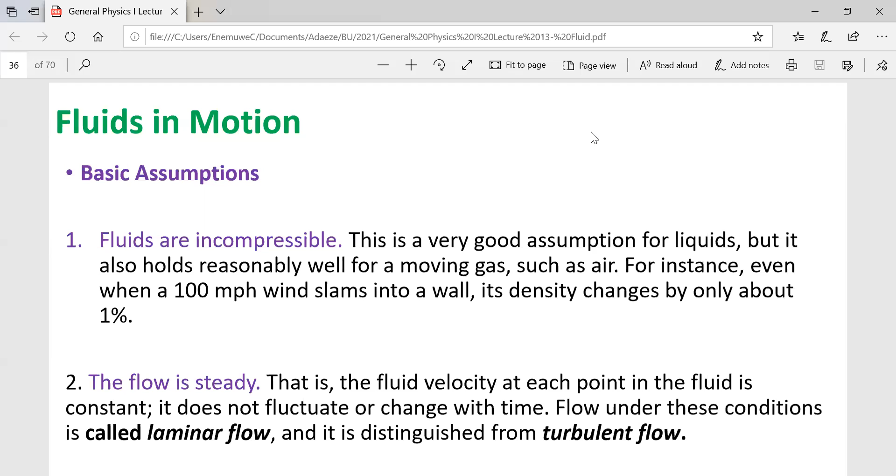So we want to look at the basic assumptions. There are acceptable assumptions that are generally used at the fundamental stage to avoid complexity in the discussion of fluid in motion. So one of which is that fluids are incompressible. Okay. Now, when we say fluid, we're talking about flowing objects or flowing liquids. And by that, we are referring to not just liquid, but gas and liquid make up fluid.

Okay, so that is why we are emphasizing here that the first assumption would be that fluids are incompressible. It's a very good assumption for liquid, and it also holds true for a moving gas, such as air, which is the most common one that we interact with on a daily basis. So an instance where air displays the assumption that it is incompressible is if you have an amount of air moving at 100 miles per hour slammed on the wall, the density will not really change, but only by a minute value of 1%. Simply means that such fluid volume cannot be compressed.

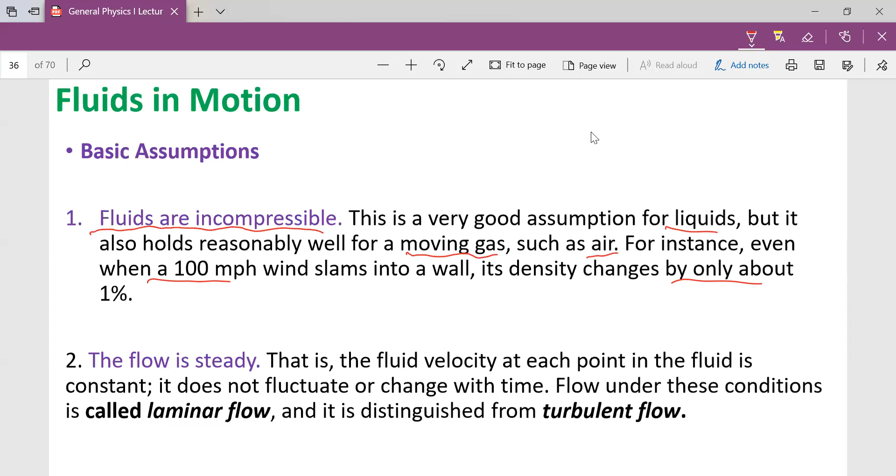Okay, so the second assumption is that we're going to stay within the domain of the flow, assuming that the flow is steady. Fluid flow is not always steady, but we'll have moments when it is steady. So it means that we're just going to stay within the domain of steady fluid flow. Okay, so we're assuming it's incompressible, and we're assuming that fluid flow is steady. And what do we mean by that?

When we have a flowing liquid, the fluid velocity at a point in the liquid is constant. And that is what we mean by flow is steady. So it does not fluctuate nor change with time. It remains the same. For any fluid whose flow is constant or is moving at a constant velocity, that is, it's not fluctuating or changing over time, we call such flow, take note of this word, okay? We call it laminar flow.

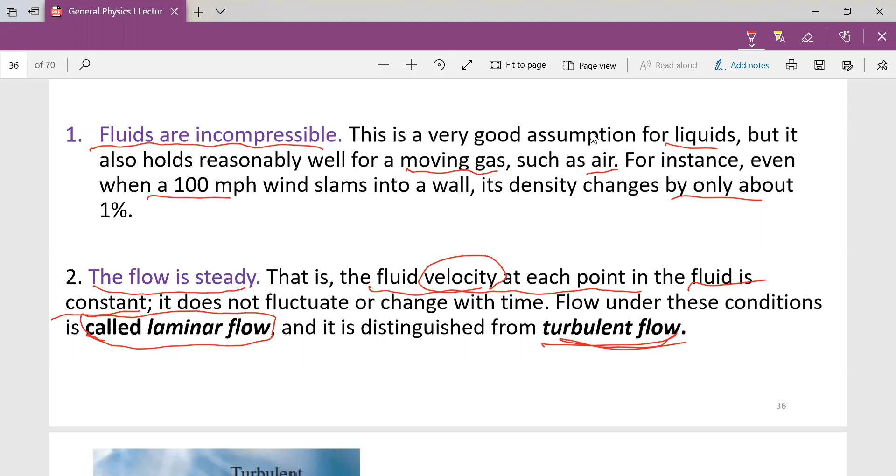Now, we have a counterflow such that the velocity is going to change and the flow becomes complex. To describe such flow, we use the word turbulent flow. And we know turbulence kind of spells negativity, but it's actually a description for flow whose velocity is changing or fluctuating randomly. Let me not use the word constant rate.

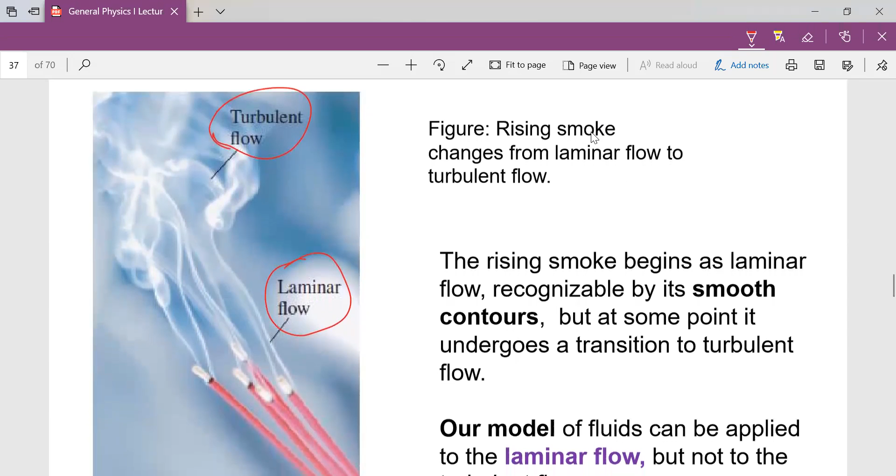Okay. So we have the image before us here. We use this image to describe clearly the difference between the turbulent and the laminar flow. You see, when you look at the region for laminar flow, it has smooth contours. You can actually define the lines. You can see the clear definition of the lines.

But when you get to the turbulent region, they are so mixed, moving randomly, such that the contours are not well defined. Okay, so when we say the second assumption is to stay within the domain of laminar flow, it means we are just going to stay within the domain where the flow lines are clearly seen and defined with smooth contours that can be described. So this is majorly the difference between turbulent and laminar flow, and it is the laminar flow that we use as our model for the description of fluid throughout the discourse of fluid in motion.

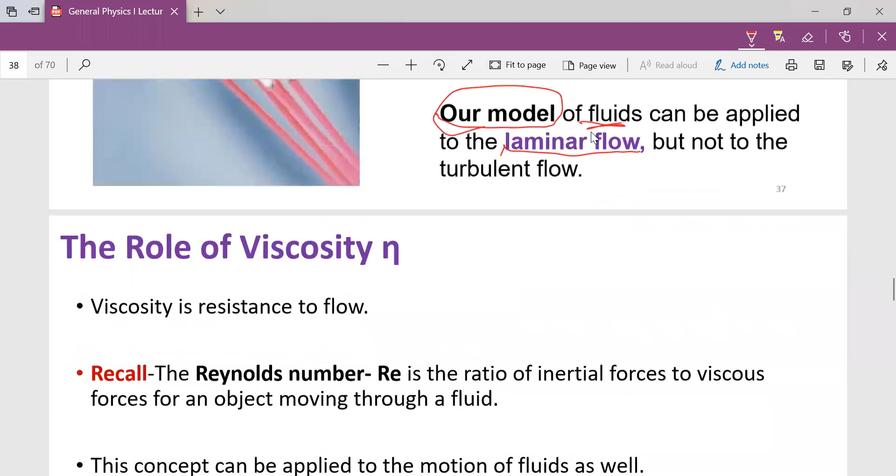Okay, so whenever we talk about the subject of fluid, we always have to look at the characteristics that describe fluid in motion, one of which is viscosity, with the symbol eta.

Now, we have looked at viscosity in chapter 5 when we're looking at applying Newton's law. Okay, when we're looking at applying Newton's law, we looked at viscosity and we discussed it with reference to drag. I think that was like a class after our drag lab.

We emphasized there that viscosity is similar to friction, and it simply means resistance to flow, just like friction is the resistance to motion. Okay, so viscosity should be viewed as the counter force like friction in liquid. It means that if you understand the idea of friction very well, it will help in understanding how we're applying viscosity to fluid motion.

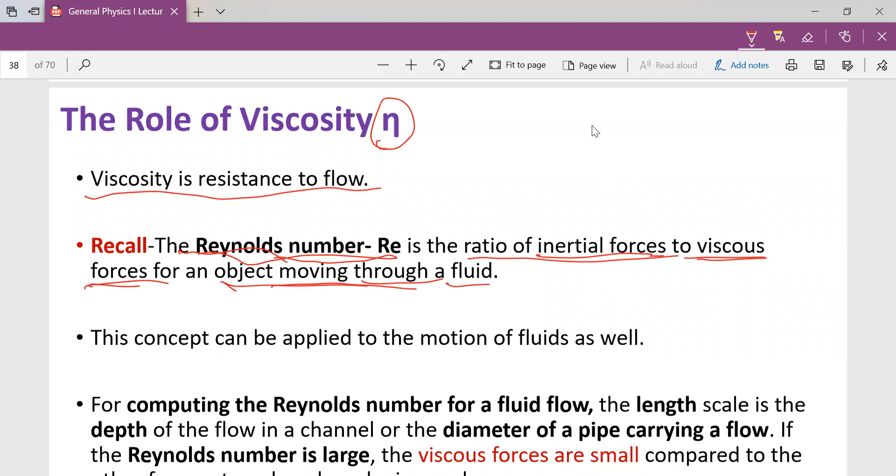And when we discussed in chapter 5, we used Reynolds number to describe the ratio of the inertial forces to viscous forces in an object moving in fluid. So we said that we use Reynolds number to define when the viscosity is high or low and when it can be ignored. So we also want to use what we learned about Reynolds number to apply to the concept of the fluid in motion.

And what is the basic idea we want to take from there? We want to emphasize that for fluid in motion, when you determine the Reynolds number, which is the ratio of the inertial forces to the viscous force, when it is large, the viscous forces are small. And what is the importance of that? It can be ignored. Just like we can, in certain scenarios, ignore friction and drag forces in our calculation, so also we can ignore the viscous force, or ignore viscosity in some of our applications.

And we do that mostly when we have a large flow, like the flow of the ocean or river. You have to do some calculation with respect to bridge construction and all that. You factor the flow, and sometimes you have to ignore viscosity because the flow is large. All right, so those are scenarios when we ignore viscosity. Okay, so let's see an example of when viscosity is ignored and when it is not. We said Reynolds number helps us define that. When it's large, the viscous forces are small and can be ignored.

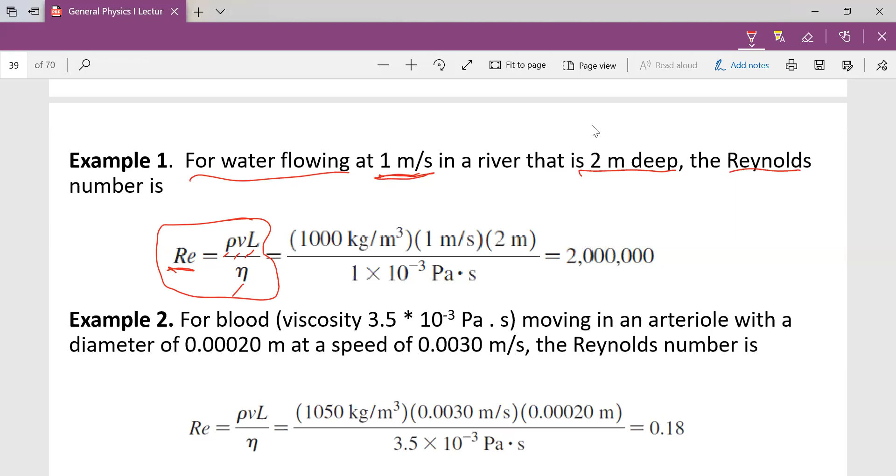Then we'll have the density of the fluid, the speed or velocity of the fluid, the depth, and the viscosity. Because we have seen this, I didn't have to define the parameters. You can always refer to the discussion of viscosity in chapter 5. We're just building on it, using the idea to explain fluid in motion.

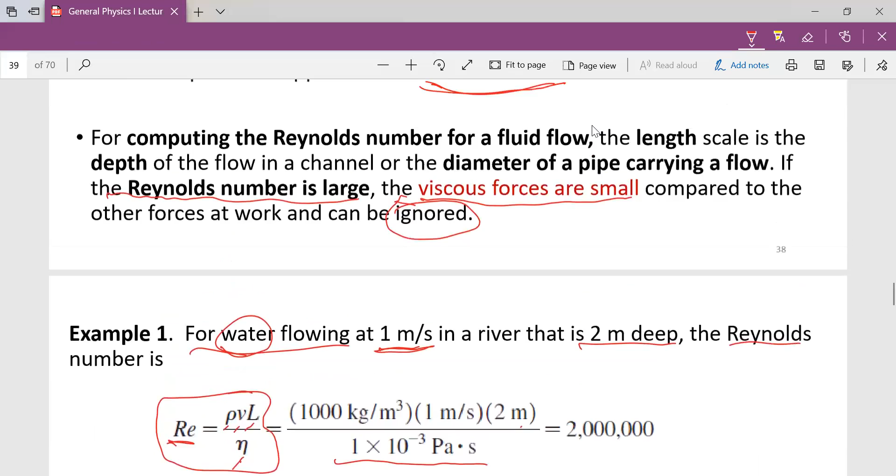Okay, so we know that for water, the density is 1,000 kilograms per meter cubed, the speed and the depth as given. Then we'll have the viscosity as 1 times 10 raised to power minus 3, which is a constant and it will be supplied. For the viscosity of water, I think we put a table like that also in chapter 5. So inputting that into our formula, we got the Reynolds number to be 2 million.

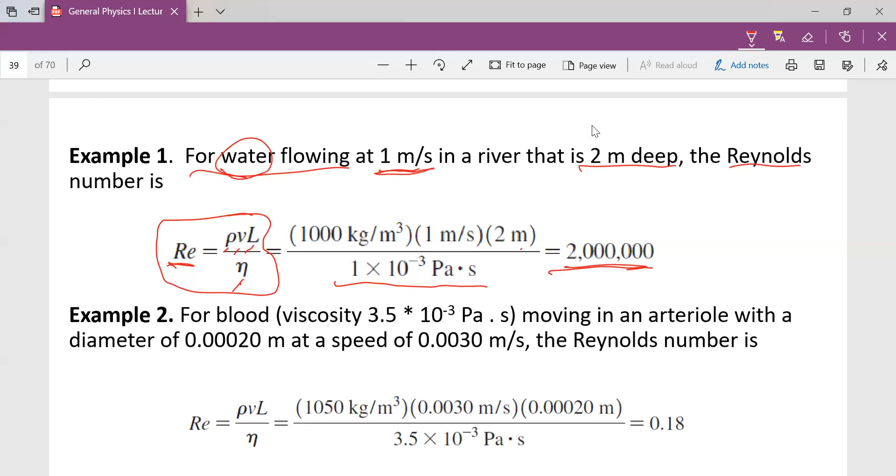And you remember that in chapter 5, we described that when a Reynolds number is, I think, 100,000 and above, then we can refer to it as large. And we had the large, the middle, and the small Reynolds number values. We just picked the large and the small. We really did not discuss the middle because the middle applies to the complexity of fluid dynamics, and we'll not get far into that.

But let's look at another scenario where you have blood flow moving in an arteriole with a diameter of 0.0002 meters and a speed of 0.003 meters per second. If we determine the Reynolds number, we see that it is small, and this implies that in the river we can ignore the viscous force because it's small, but here we cannot.

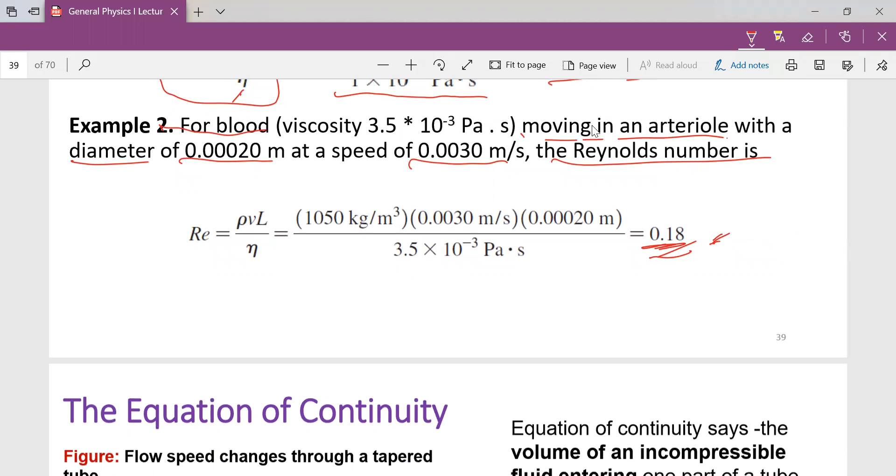So whenever they are doing calculations about sending fluids or blood flow, regulating the heartbeat to control the flow of blood in the veins and arteries, they factor in the Reynolds number because it will greatly influence the decisions in that design.

Now, apart from the properties such as Reynolds number and viscosity, we have other properties or other subjects that apply to the description of fluid in motion that are very important to understanding how fluids flow, especially when they are changing from a large area or surface volume to a smaller size. And we'll be looking at 3 equations, which is about concluding this part of our discussion. 3 equations outside the Reynolds number and viscosity ideas.

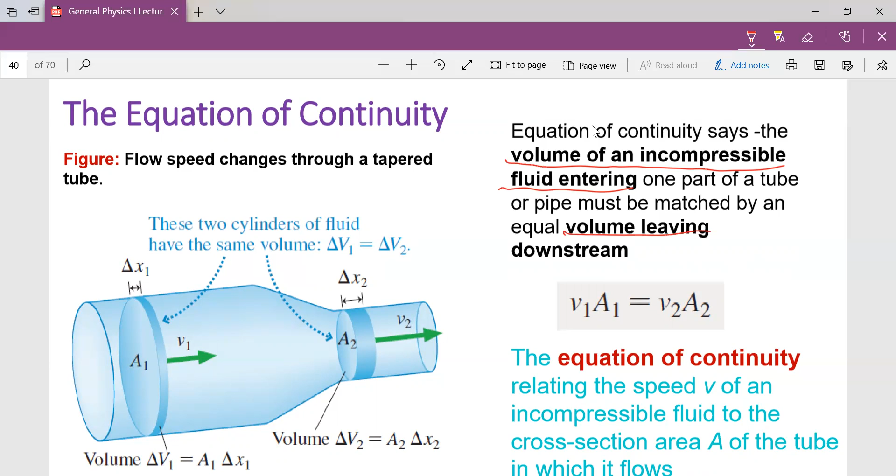Okay, so the first is the equation of continuity. The second will be Bernoulli's equation, and the third will be the Poiseuille equation, which is the last one. So let's start with the equation of continuity. Remember our assumption throughout is what we'll be using. The equation of continuity says that the volume of an incompressible fluid entering one part of a tube or pipe must match or is equal to the volume leaving downstream.

Okay, so let's see the figure before us. The figure before us is a description of the flow speed change in a tapered tube. Now, we have examples of tapered tubes every day. You use your toothbrush, you press the fluid from inside the toothpaste onto your brush. That is a typical example of a tapered tube. So you see that the content inside is pushed through the other side to get the fluid or liquid that is inside that tube.

We have other examples such as the flow of blood in our arteries, moving from the heart, that will adjust to different sizes of our arteries. Also, we have the flow of oil in pipes and so on. So we meet tapered tubes every day to control the transportation of fluid in several systems. So if we look critically at this to understand the statement of the equation of continuity, which says the volume entering is equal to the volume leaving, it establishes that the change in volume for 1, let's use the big size as V1, is equal to the change in volume V2. That is the basic statement of the equation of continuity.

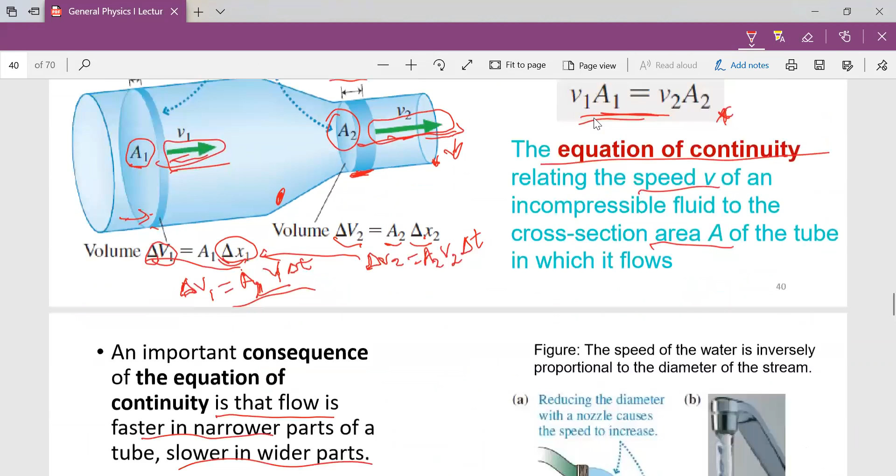It's telling us that the flow is faster at the narrow part than the wider part. If you look at the velocity vector diagram, the arrow here is longer than this one. So you see the flow is faster on this narrow part than the larger part. That is one.

We have other consequences, the understanding of which we use to describe the volume flow rate Q. So if you look at the diagram we have here, you see the area here is larger than this one. What does that tell you? It means that the speed here is lower than this one. We said the flow at the narrower part is faster than that of the wider part.

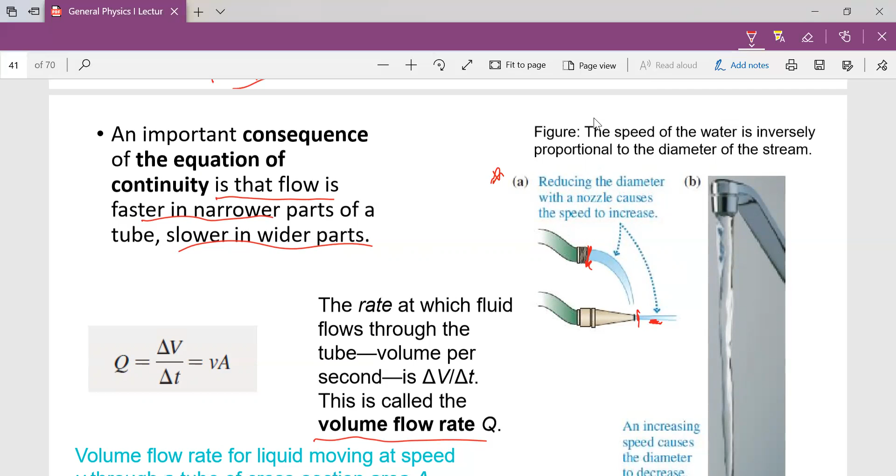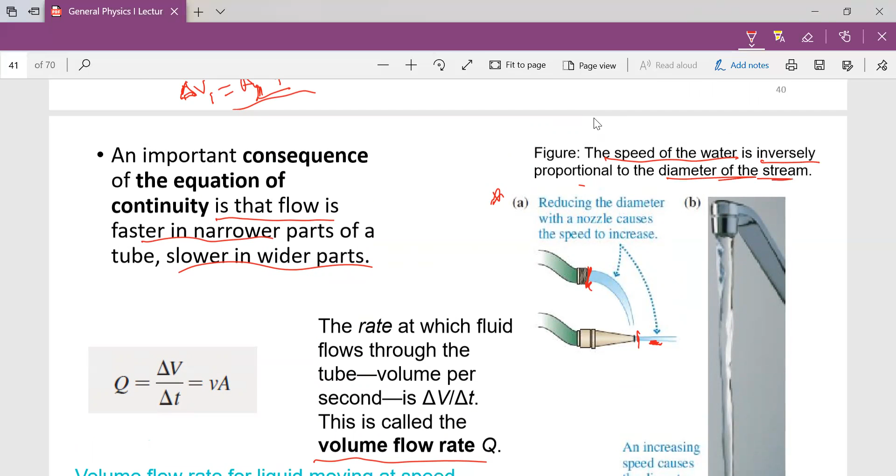So it is this idea that we also use in the design of your water tap openings and the pipes that will run in the house. Okay, so simply put, the speed of water is inversely proportional to the diameter of the stream. The speed is inversely proportional to the diameter of the stream.

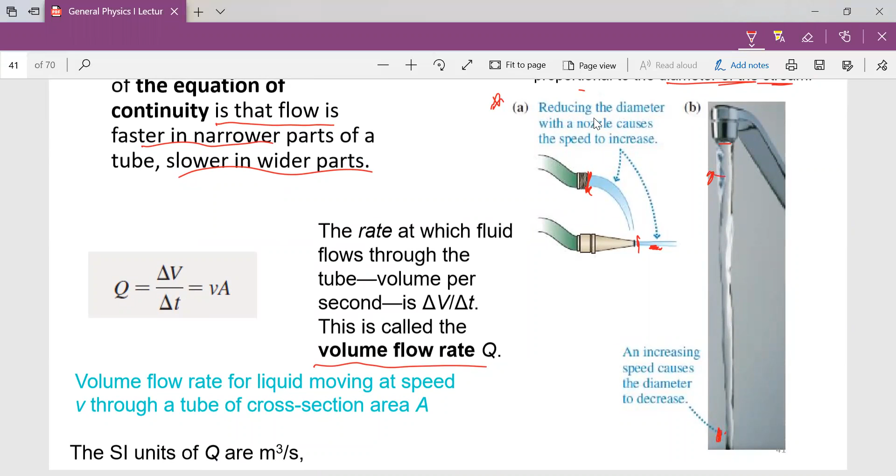If you look at this diagram, you see that as it's coming out, the area here is wider, the speed here is larger than the one here. Okay, so distance also plays an important role, which we'll be seeing again. So let's quickly look at an example.

The question says a garden hose has an inside diameter of 16 mm and the hose can fill a 10-liter bucket in 20 seconds. The question is, what is the speed of the water out of the end of the hose? And what will you do to increase the speed 4 times, to make it 4 times greater?

So we apply our equation here. Take note of this, the flow rate, change in volume, being equal to V times A for a steady flow, okay? That is for laminar flow. So applying that, if Q equals VA, V, which is the speed, will be equal to Q over A.

We determine our Q from the equation change in volume over change in time. They give us the volume and they give us the time. We obtain this in liters per second. So before we can apply it into the equation, we have to change the unit to standard value to obtain 5 times 10 raised to the power minus 4 cubic meters per second. So that's what we put here.

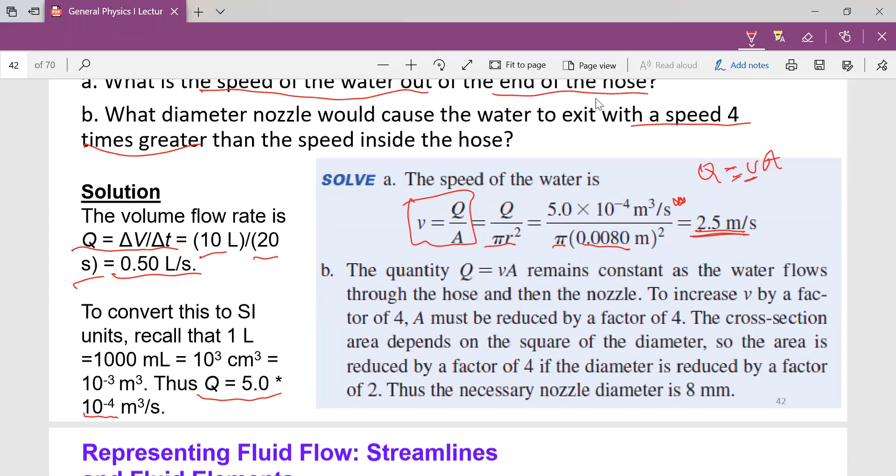They said, what can be done to increase the speed by a factor of 4, make it 4 times greater? So to make that 4 times greater, we see in this relationship that we have to work on the area. Remember our first diagram, telling us that we increase the area, we reduce the speed, we reduce the area, we increase the speed. It means that the area has to reduce by a factor of 4.

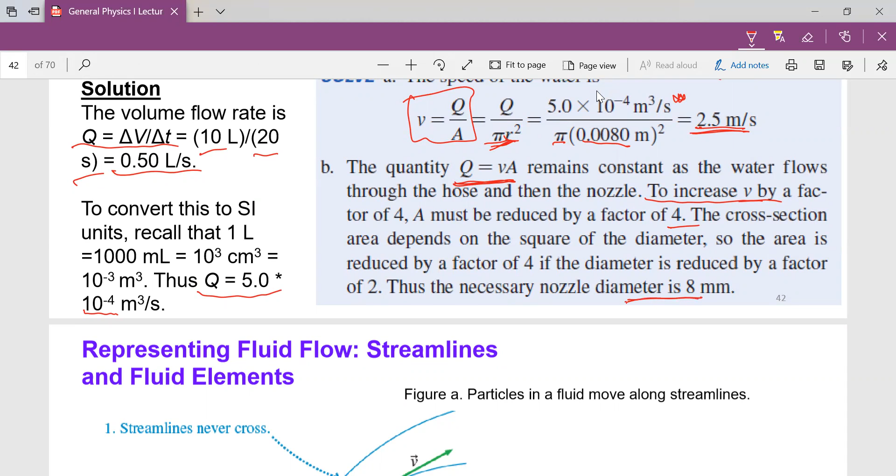Okay, so in the description of a continuity equation, we have other parameters that help us understand fluid as well. One of which is when representing fluid, we use the terms streamline and fluid elements. Streamlines are simply paths taken by the particles of fluid. If you can point out a particle of fluid, especially in laminar flow, you see them clearly with defined contours. The particles of fluid have a trajectory. That trajectory is what we call the streamlines.

And we'll have another one, which is the fluid element, which will be seen in the next slide. It's simply talking about the movement of a certain volume or large amount of fluid. We call such a fluid element. And when we are focusing on the particle, it is called a streamline. So you have multiple streamlines inside a pack called a fluid element.

So now we have said this is the trajectory followed by the particle. This is a trajectory, this is a trajectory, this is a trajectory. One of the characteristics of streamlines is that they never cross each other. Okay, they never cross.

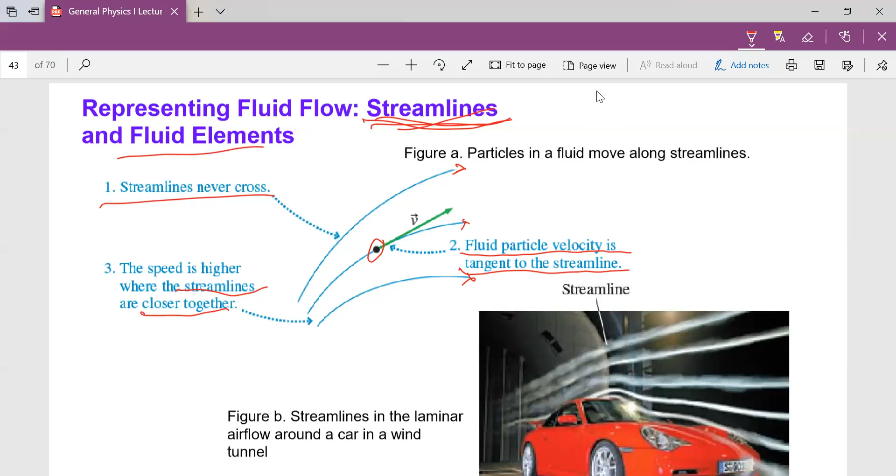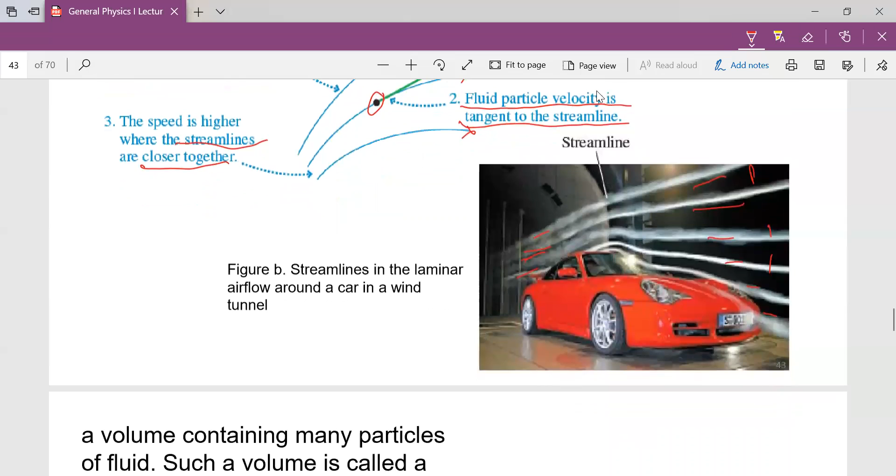So the speed is higher when the streamlines are closer. When they are wide apart, it simply implies that the flow is slow. When they are closer, packed together, it is fast. So you see the wind, which is the fluid, the gas over the car, you see how it took the contour, and the trajectory of each of the particles can be seen. When they are closer together or far apart tells you the speed: it increases when they are tight, slows down when they are wide apart.

So let's quickly look a little bit at fluid dynamics. Now, the equation of continuity described to us the motion of objects, but did not specify why fluids are actually moving, what is actually inducing the motion. So when we want to talk about fluid dynamics, we want to look at what is inducing that motion, what are the laws governing that motion. And it is this dynamics that will help us look at the two other equations that we said we'll be looking at today.

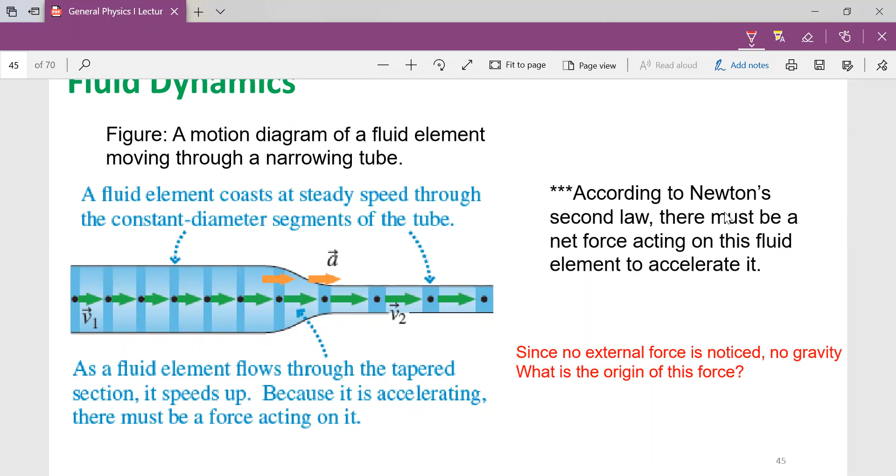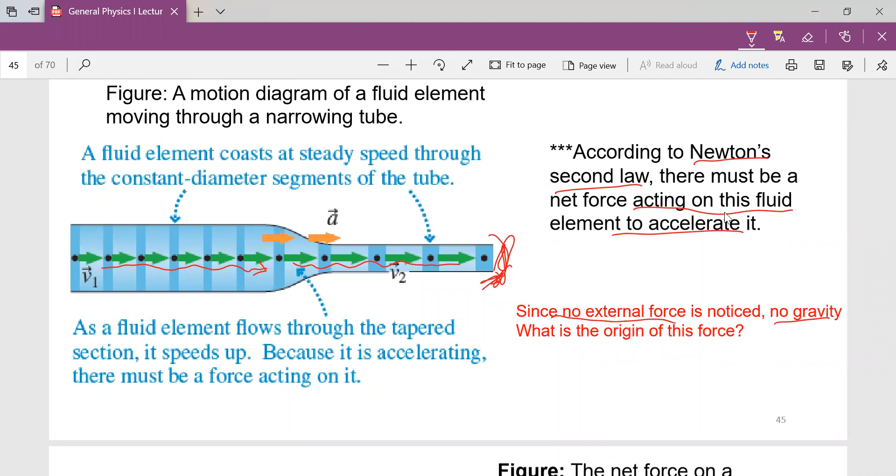So we see a fluid here, a description of a tapered tube. You notice if you look at the vector diagram of the speed or velocity, it is increasing as it goes into the smaller size of the tube. Okay, so we want to use Newton's second law also because it applies here to understand how this fluid is accelerating. We can notice that there is no external force. There is no force of gravity since it's moving horizontally. So where is this force actually coming from?

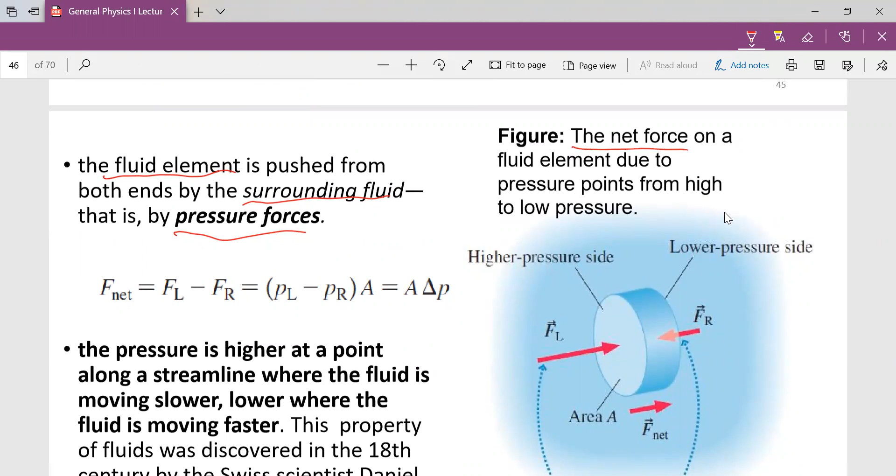The force is actually coming from the fluid. Remember fluid elements, the bulk of fluid, volume of fluid together, pushing at the end of each other, with the walls of the container and also pushing at the fluid particles. So it has a surrounding force that we'll call the pressure force. So it means that we're going to be applying our understanding of Newton's second law and pressure to describing fluid flow. And that says that the net force on a fluid element due to the pressure goes from high to low pressure.

This diagram specifically shows that. Look, the net force is always going to be in the direction of what? The acceleration, remember Newton's second law. So we see the force here from the left is higher than that of the right. So the net force is in that direction. The acceleration is towards that direction. And the relationship of the pressure to the area and force is what we describe with the word Bernoulli's effect.

And it simply tells us that the pressure is higher at the point along the streamline where the fluid is moving slower. So the pressure in the larger area of that tapered tube is higher than that of the smaller parts. So with high pressure, the speed is low, but with smaller pressure, the speed is high. Remember your pressure equation is P equals F over A, right? That means force is equal to PA. That is what you have here.

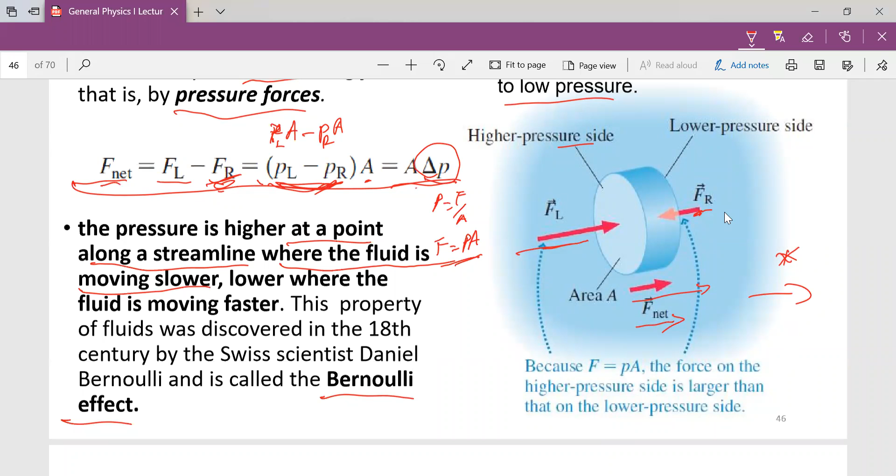And this actually implies change in pressure. So we'll have F net being equal to area times change in pressure. And that statement simply tells you that the pressure in the larger part is higher than that in the smaller part, and that is why it moves at that slow rate.

Okay, so we'll have the instrument that we use to measure the fluid speed, and that instrument is designed according to the venturi tube. We have several devices with different names, but they use the principle of the venturi tube. Okay, so the device, the venturi tube, is what we use to measure the speed of fluid. And how does it do that? By factoring the difference in pressure and also the difference in the distance of this.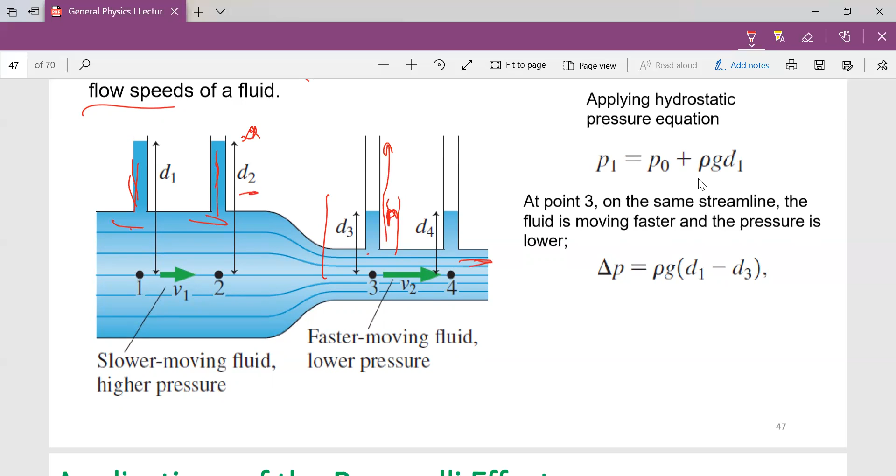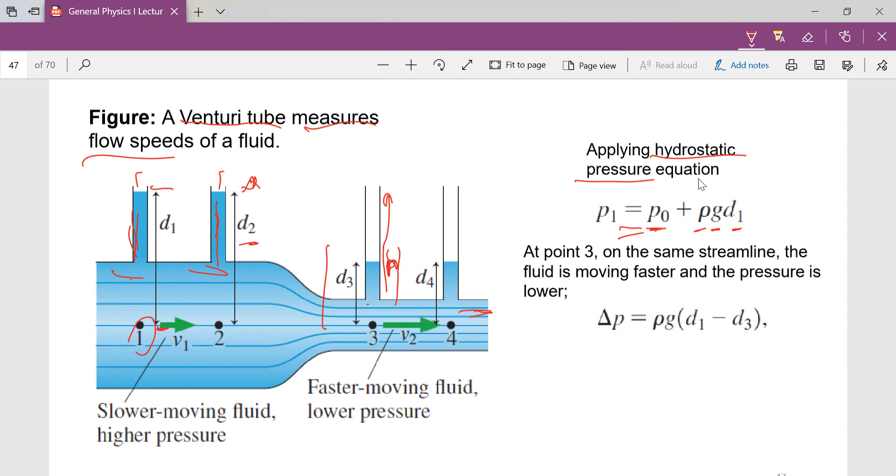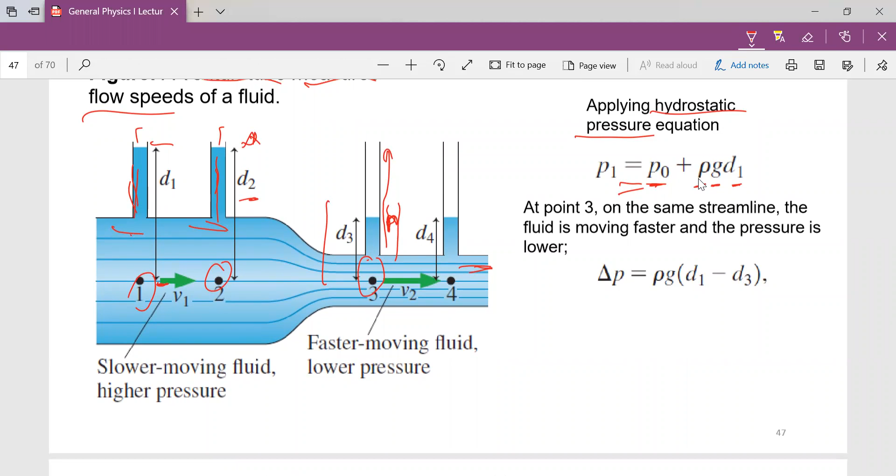So we'll apply the equation we have seen before from the hydrostatic pressure equation, that the pressure at point 1 will be our P0, atmospheric pressure acting here, being equal to the density, the gravity, and the distance here from the midstream line of that tube. Okay. But at point 3, that applies also to point 2. At point 3, where the fluid translates to a smaller portion, we have the change in pressure to be actually the change in this distance, which is the change in D1 and D3.

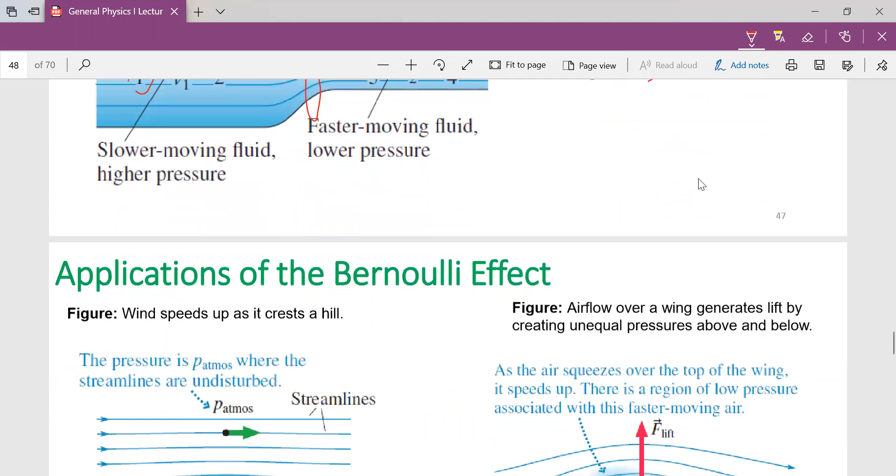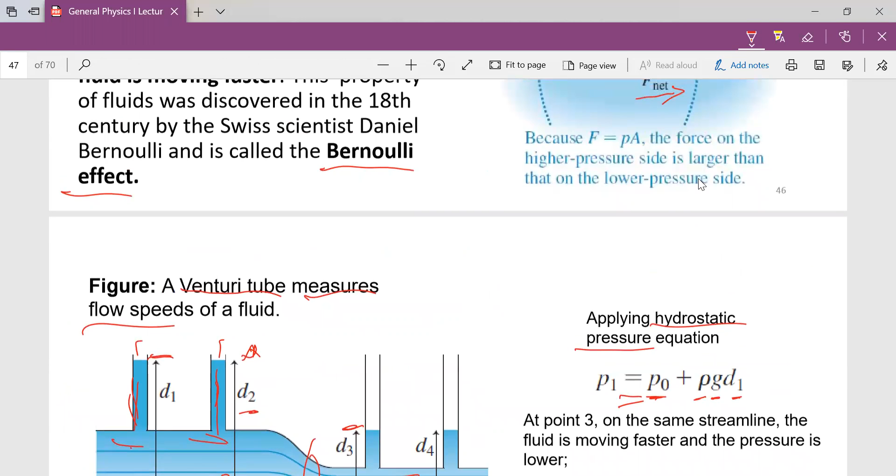You see the D3? Let me remove all this so you see it clearly. The distance from the midline to the fill in that tube. So this is how the flow rate across this bend can be determined using this venturi tube. Okay. So this simple design is what is put together in many devices that we use to measure the flow speed of liquid. So we have emphasized that this is actually the application we call the Bernoulli effect. Let's see how that plays out in real life.

We have different instances where we apply the Bernoulli effect to science and technology. And basically, before we mention other examples, let's see how it works. I said that when you have even spacing, it means what? The constant velocity for streamline description. So we have a description of the wind speeding up across the crest of a hill. This is the hill here. The winds here are moving at constant speed. You see the speed here is constant, but once they are cresting or moving over a bulge, you see something happens to the velocity vector.

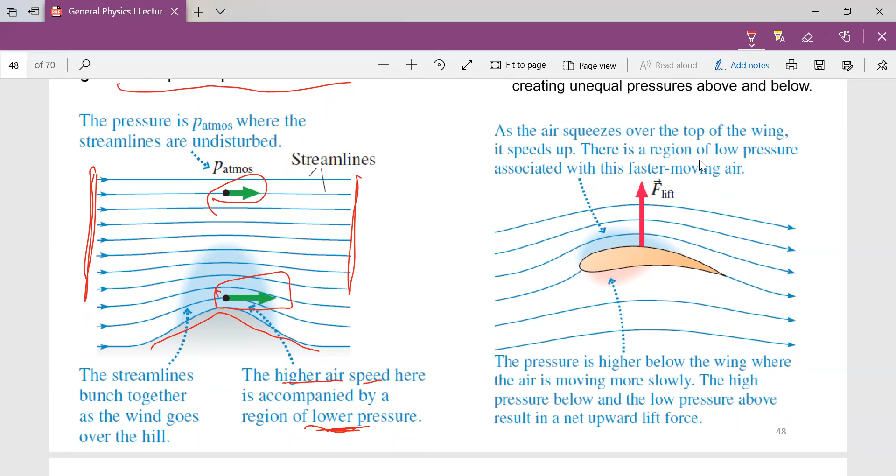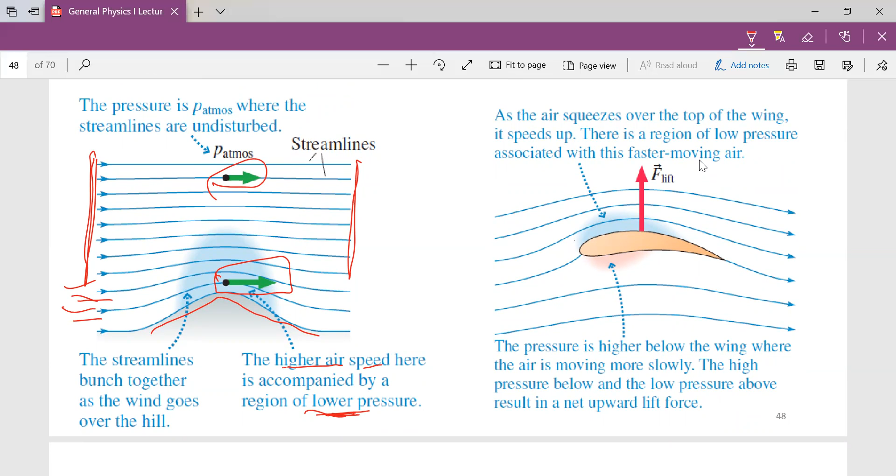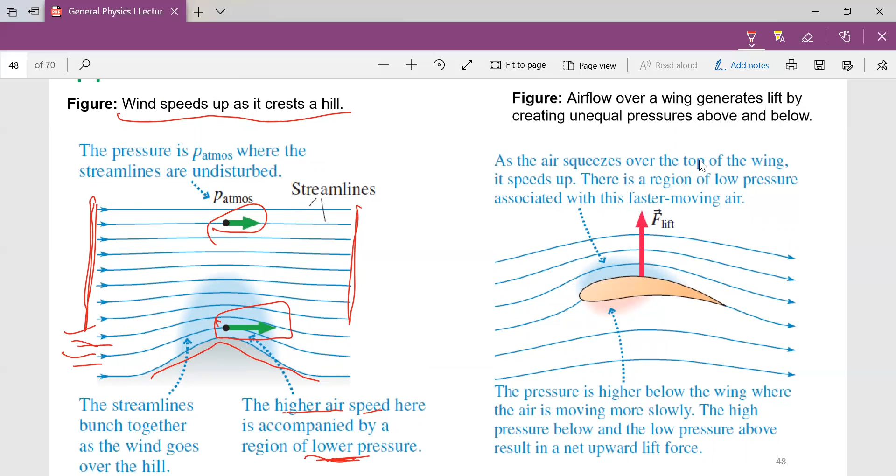It increases. That simply tells you that the higher air speed here has lower pressure. So remember your tiny tapered tube: low pressure, faster speed; large pressure, lower speed, right? So as these trajectories of the particles of wind crest or move over a hill, they speed up. And it is that principle that is applied. If you look at that bird in the very first description of our introduction to fluids, you see the bird building up momentum before it goes airborne. It's building up, spreading out its wings, trying to maximize these principles that nature has taught us, to go into a lift, to go into the air.

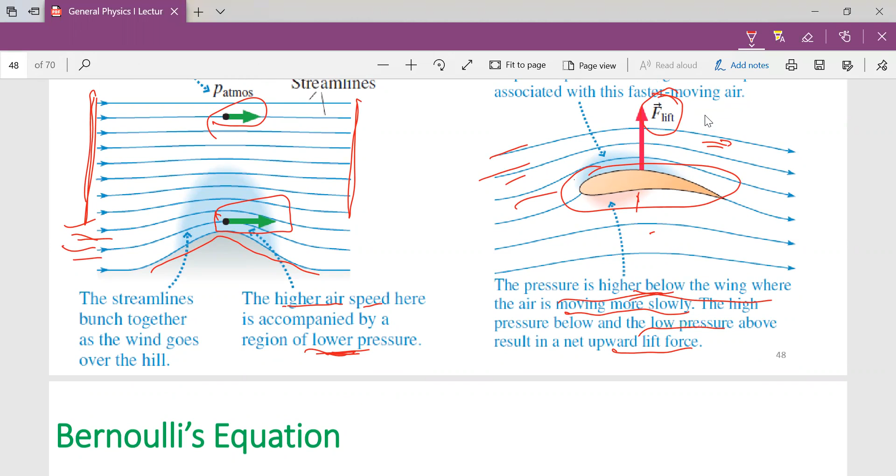And the same applies also to the design of planes. In this example, the wing of a plane, once it's advancing, in motion in that fluid, the fluid over the wings will have high speed. The one under will be moving slower and causes a push that brings about the force called lift. Okay, so it will lift the plane. As you control with a certain design in the plane, you get a lift to the desired height that you want. So they are maximizing the adjustment of the low pressure and high pressure to define the speed and bring about the lift force on that plane design.

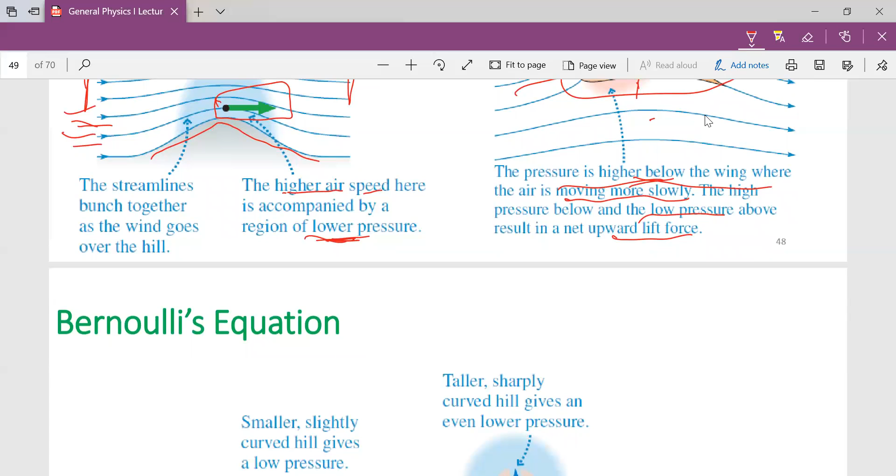Okay, so a lot of calculations are put in place; this is just giving you the ideas to appreciate these principles in real life. Okay, so we look at the second equation, which is the Bernoulli equation. The Bernoulli equation simply describes the fluid change when there's an elevation in the fluid flow. It factors in the force of gravity, that it can actually cause an increase or a decrease in the fluid speed.

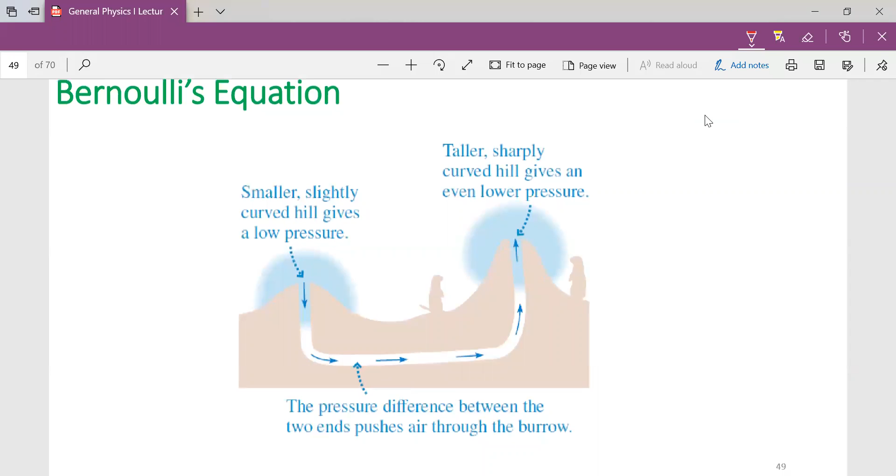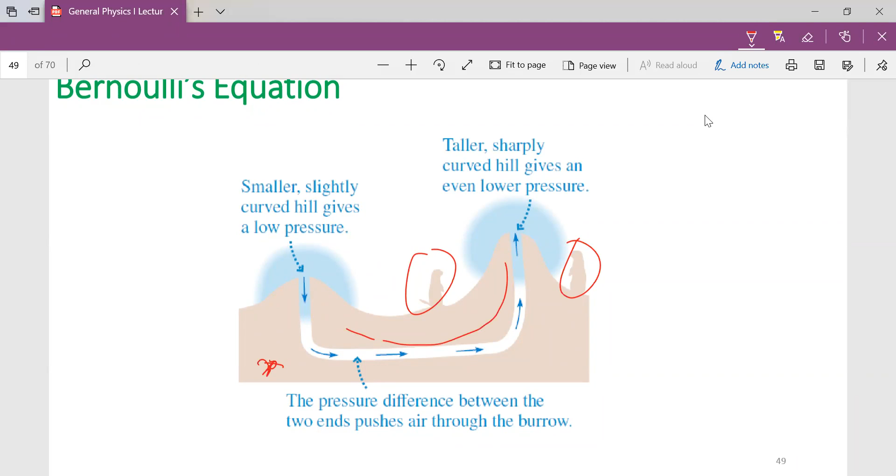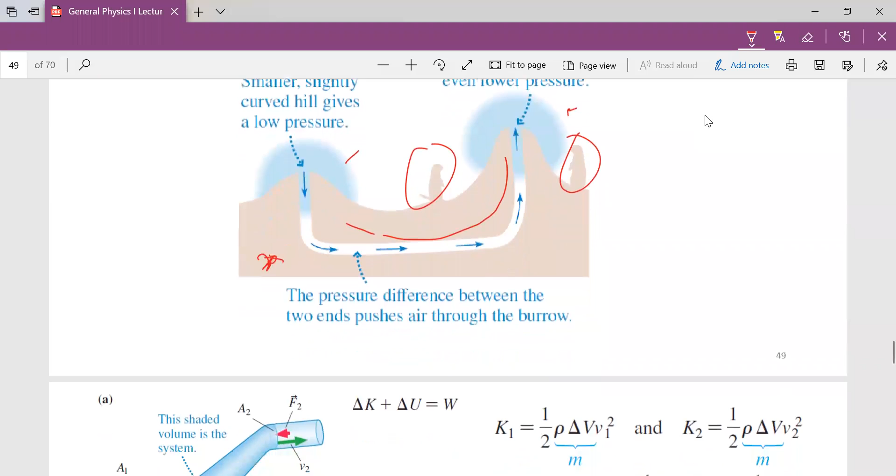Okay, these are meerkats. When they burrow holes, they apply this principle in their senses; the flow of fluid through their holes helps them sense what is happening outside. So apart from animals' senses, we apply this Bernoulli equation in the construction and design of tubes. It is the understanding of fluid dynamics that we use to design the pipes used to transport large volumes of fluids and gases to different parts of the world. Okay, so remember when we treated this in chapter 5, we wrote out this equation. Sorry.

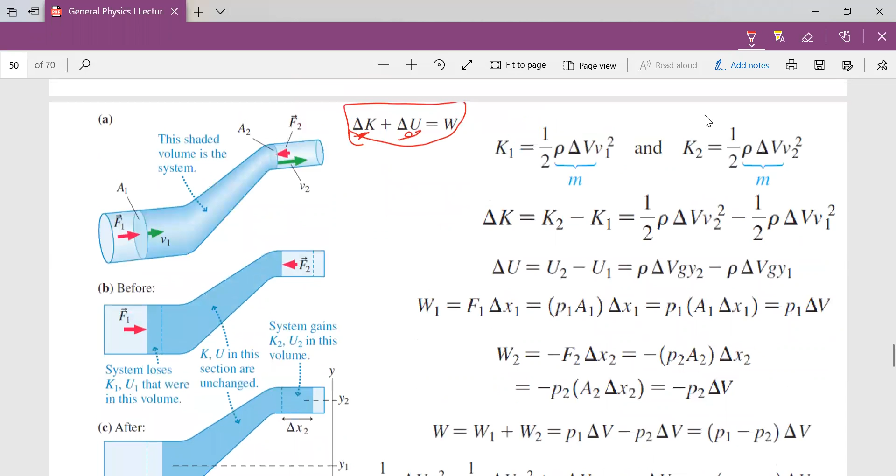Okay, where this kinetic energy, changing kinetic energy plus changing potential energy equals work. That is simply the principle that Bernoulli applied and factored the parameters using the changes in the flow, which are the principles we looked at to derive what we call Bernoulli's equation. Don't be scared of all this. They are not mystical. They are everything you've seen before.

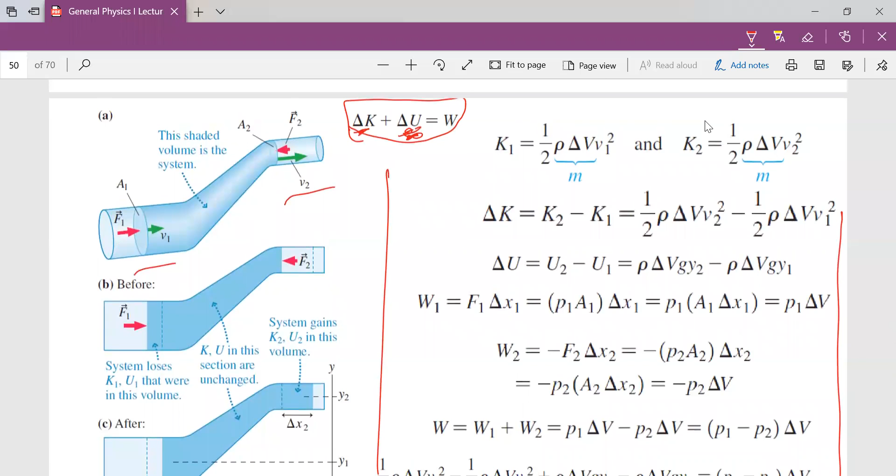So when we say potential here, we're referring to the gravitational potential. You remember gravitational potential, the force on every object above the ground. All right. So the gravitational potential plus change in kinetic energy equals work done. How did Bernoulli apply this? If this is true, and we have different surface areas of tube, a tapered tube typically, that means if we can establish a relationship between these two sides, we can apply this principle to describe the work done when there's a flow in this kind of tube.

So kinetic energy, because there are two sides, that's what brought about those changes. Half mv squared, right? If K equals half mv squared as we know it, you remember the relationship density equals what? Mass over volume. Mass, therefore, will be equal to density times V, right? So if you substitute that into this, mass is the product of density and volume, then the velocity squared. So the equation is what you know. You see that it's not strange. This is actually half mv squared expressed in relation to fluid because of the density.

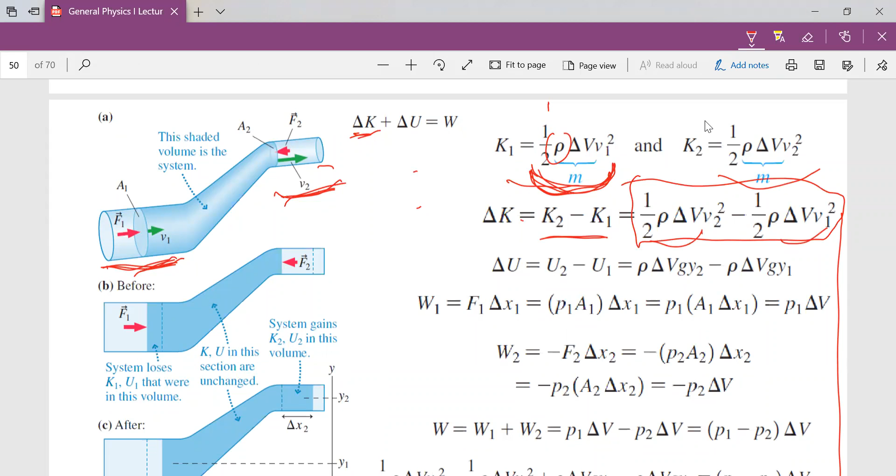So for part one, that is the kinetic energy for this side, and this is kinetic energy for the second side. So the change in kinetic energy will be K2 minus K1; substitute this expression into it, and you have K2 minus K1 expressed as this part. Now, same applies to the potential. Potential energy is mgh, h being the height, which we represent with y here. This is your m, right? Product of density and volume. Then gh, this is depth or height. Okay, so change in potential is also this.

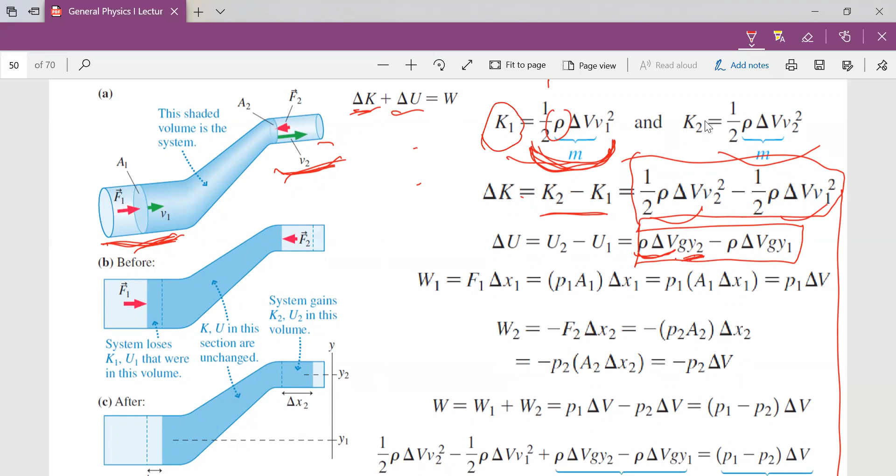So we have done K, we have done U. We want to use the understanding of work done as well before we put the equation together. So work done equals force times distance. And we know that P equals F over A, so force equals PA. That's how we got this one, times distance. So work done as force times distance equals this for part A. That's for point one here. And then for part B here.

Therefore, the net work done in the system W will be the sum of this plus this, because we have the negative here, negative work done. The force here is going this way, positive, and the force here is going this way, negative. So that's where the negative came from. Positive work done by F1, negative work done by F2 because of their direction. Okay, so we'll put this and this into this equation.

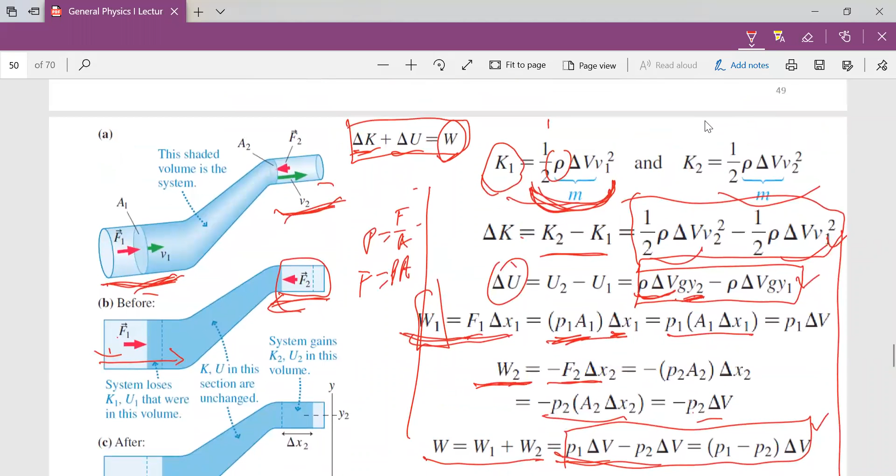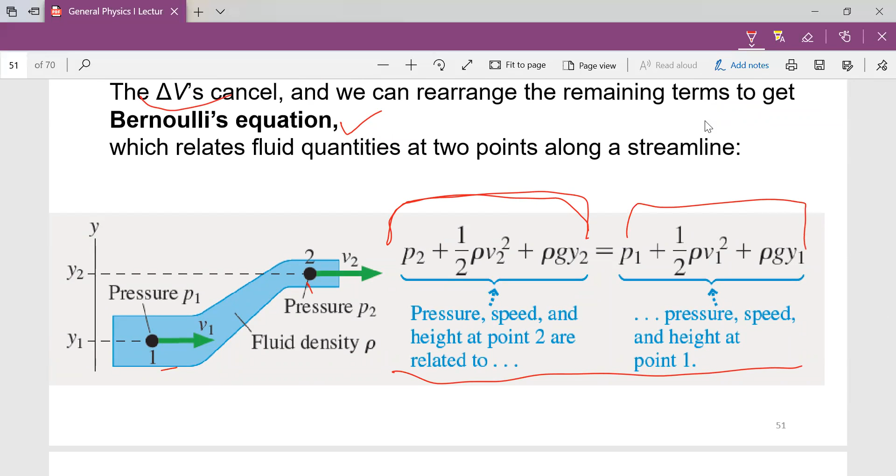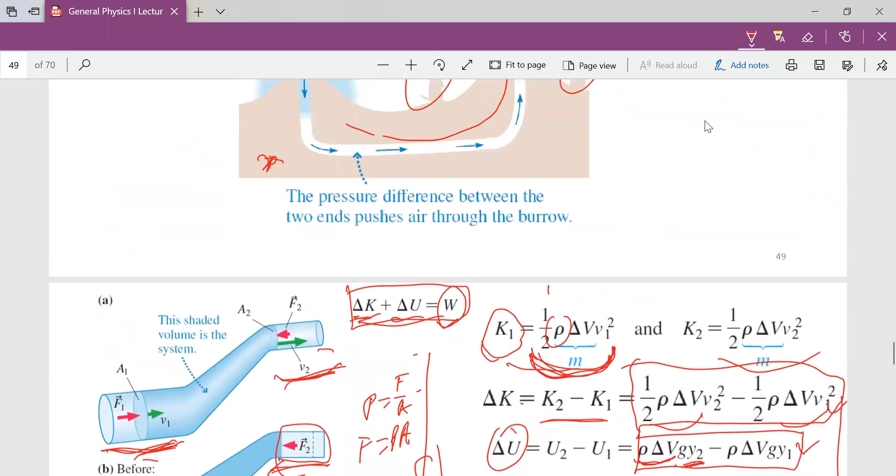If we do that, we'll have the full expression here. And you notice this is constant, so it can actually go off. You strike out the V. If we cancel all the V's and rearrange, we'll have what we call the Bernoulli equation, which is given as this. You collect like terms, meaning collect all the terms for point 2 and the ones for point 1. Equating both gives you Bernoulli's equation. You see, it's a straightforward one. For those of you who love mathematics, you enjoy proving Bernoulli's equation.

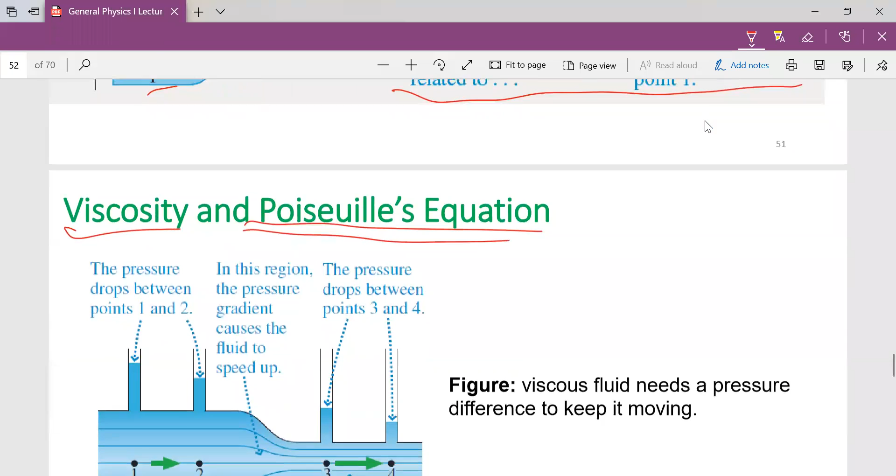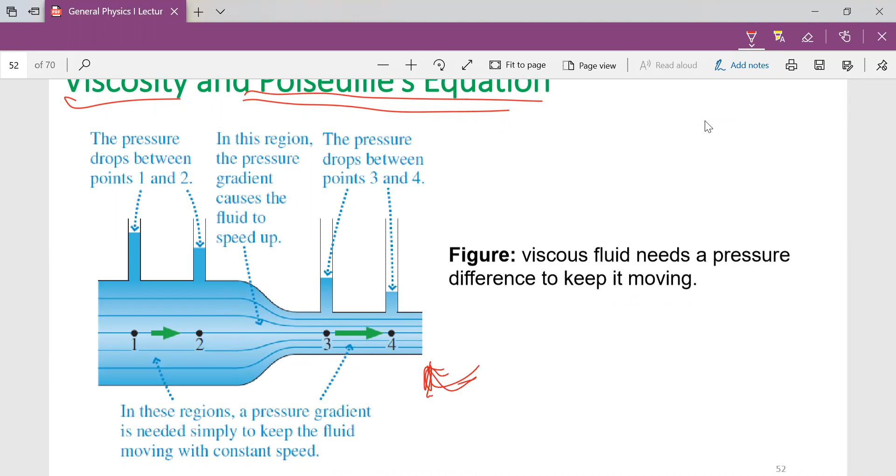So we'll look at this word, it's a French word, so pardon me if I don't pronounce it correctly. The Poiseuille equation, yes. So viscosity and Poiseuille's equation. Bernoulli applied this basic principle of the work done. What did Poiseuille really do? He used this equation to help us understand the relationship between the radius and the length factor in fluid flow, all of which also goes back to the venturi tube, which is the understanding of how fluid flow can be measured.

Okay, so let's quickly go straight to what the Poiseuille equation talks about. It established the pressure difference needed to keep the fluid flowing. And it stated that the pressure difference is actually proportional to the viscosity.

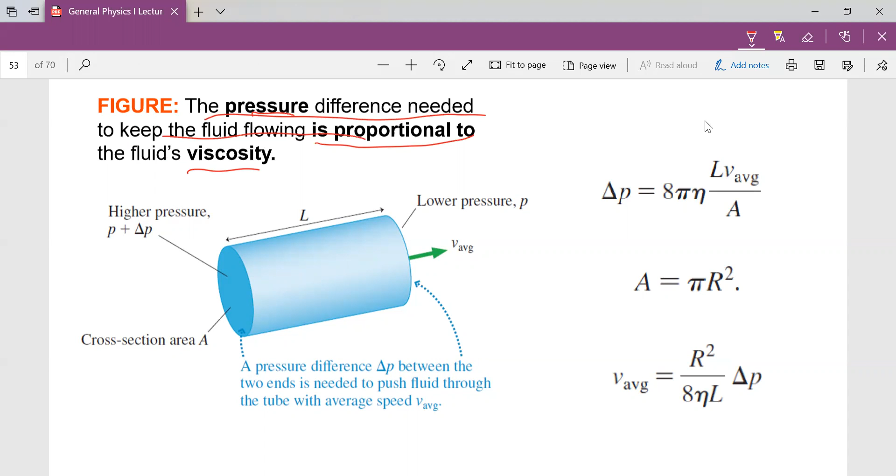That is what Poiseuille's equation gave to us. And it brought in the concept of the tube flow again, described the cross-section area A, and the pressure difference, which we already know: a fluid in motion will always be a result of pressure difference between point A and point B. Okay, so if we give the relationship as change, that's the pressure difference. The derivation of all this is what we didn't bother to put because it's very lengthy. And since you are not going to be applying it so much, we just have to point it out here.

So the expression of the pressure difference is given as 8 pi eta, which is the viscosity, which shows you the direct proportionality relationship, and all this being the constant of proportionality, with respect to the length of this tube and the average speed over the area. And area is given as pi radius squared. If you substitute that into this equation and make V average the subject of formula, you have the expression here.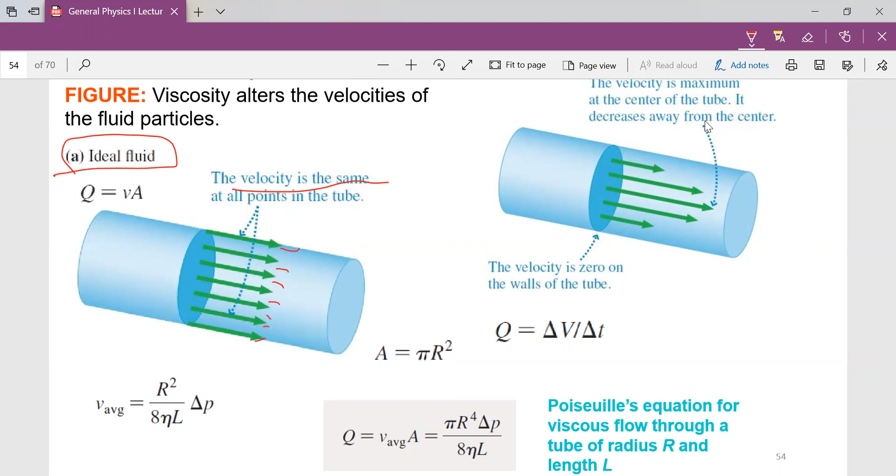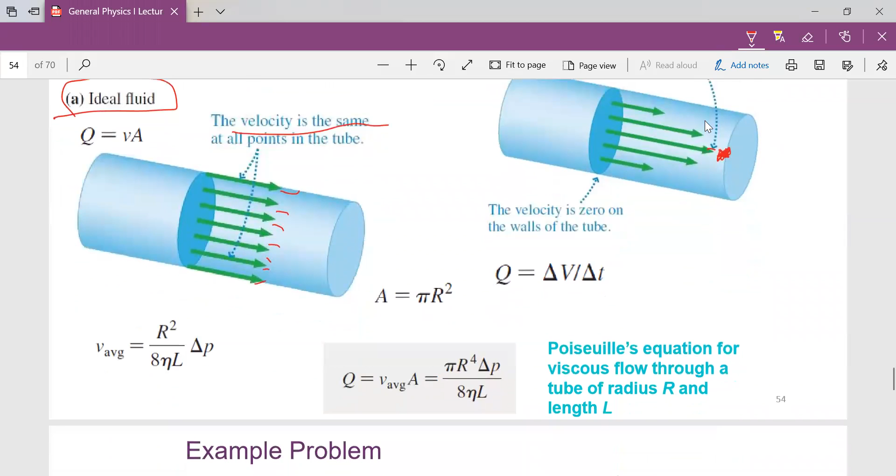Poiseuille's equation also factored in that in an ideal tube, you have all the streamlines flowing at the same rate, but in reality, for a viscous fluid, once the viscosity comes into play, the maximum velocity is felt at the center of the tube. And that is why we describe even the venturi tube using the mid streamline. The same applies for the rate.

Applying the rate, understanding our rate as V over change in T, and our area as pi R squared, given the derived average equation for V, we now substitute this into V, so the rate Q is given as, remember our first equation, Q equal to A V at the beginning. If the rate is given as this, and Q itself is change in volume, we now apply these two to arrive at Poiseuille's equation for viscous flow through a tube of radius R. And how did he do that?

Let's quickly, oh, time has gone. Okay, Q equal to A V, puts this as A, right? And V average is given as this. So bring in A as this, bring in V as this, and we'll have this equation because they will cancel out. Pi came to the top from the area, R squared multiplying R squared to give you this. Once you write it out, you arrive at this final one.

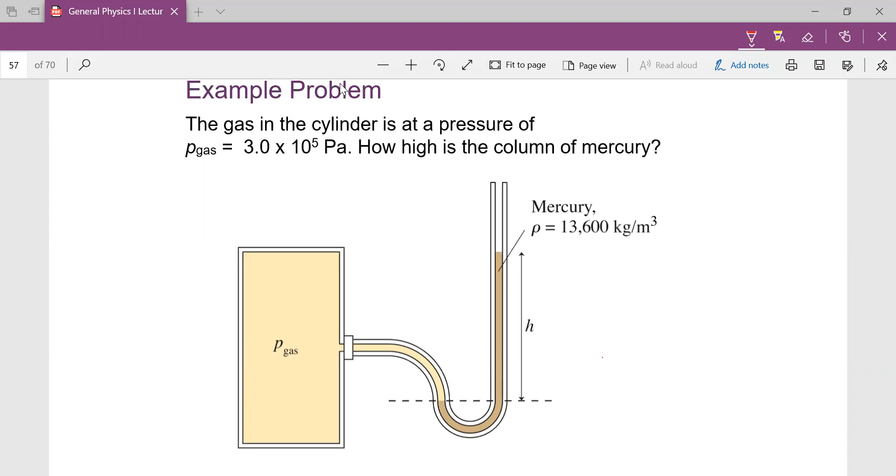Okay, why is the pressure higher when the surface area is greater? Yeah, that was about the earlier bit, where in an area of smaller diameter, the pressure experienced by the water is less. Okay, so what are we defining pressure as? Because I'm just a little bit confused there.

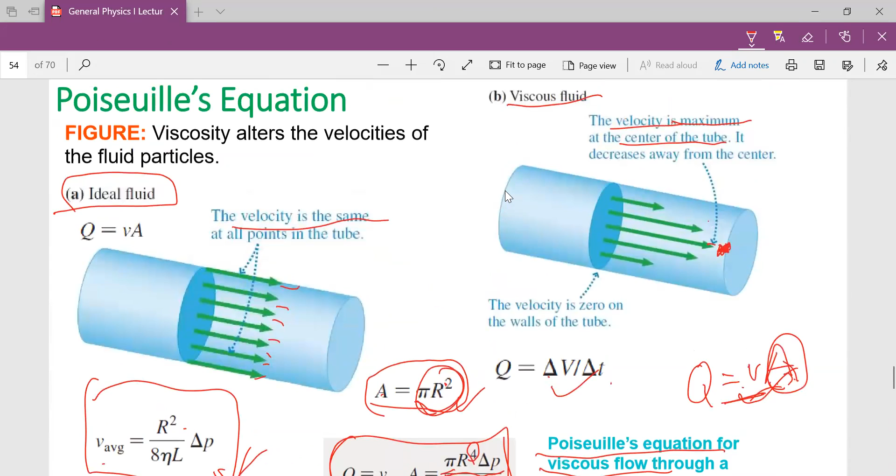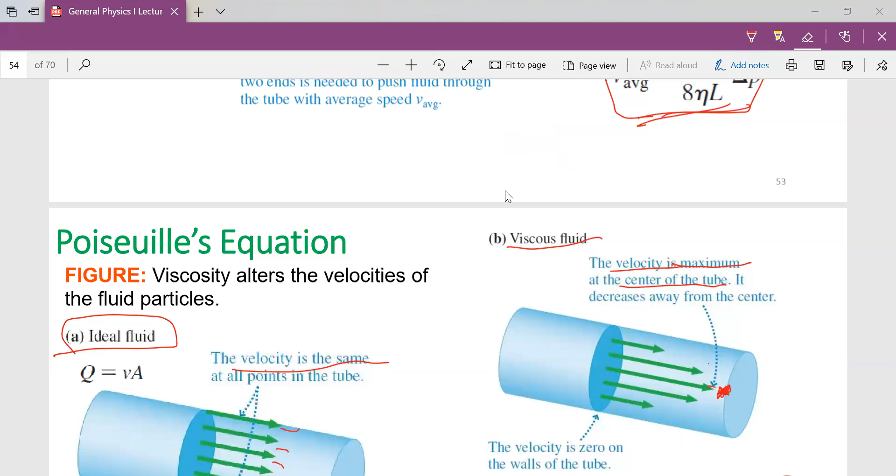Pressure is defined from our basic definition, P equal to F over A. Pressure is equal to force over area. So pressure actually has an inverse proportionality relationship to area. You get it? So as area increases, pressure decreases? Yes. So this is actually what is happening there. When you reduce A, P goes up, okay? Okay, so is this the pressure being exerted on the water by the container?

Yes, the pressure exerted on the water. The force is actually from the pressure within the molecules of the water, because there's no external force. The force comes from the container as the molecules of water collide with the container, and the fluid element. Remember, the very idea is the streamline, one particle of fluid. When they are compact together and press against the wall of the container, the pressure comes from the fluid element and tends to push.

So if there is a pressure difference, where it can go from the higher pressure to the lower one, it tends to flow in that direction. So that pressure difference is what induces the flow, just like the pull of gravity on an object above the ground. The difference pulls from the region of high to low.

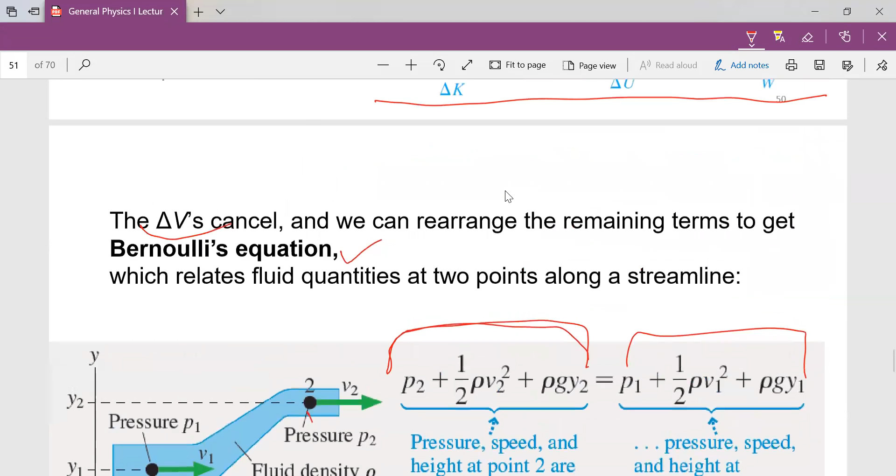Okay, how does this relate to laminar flow then, or are we just assuming it's laminar? The definition of laminar flow? Yeah, because are we assuming it's organized like this or disorganized? I'm just trying to understand if it's a turbulent system or not.

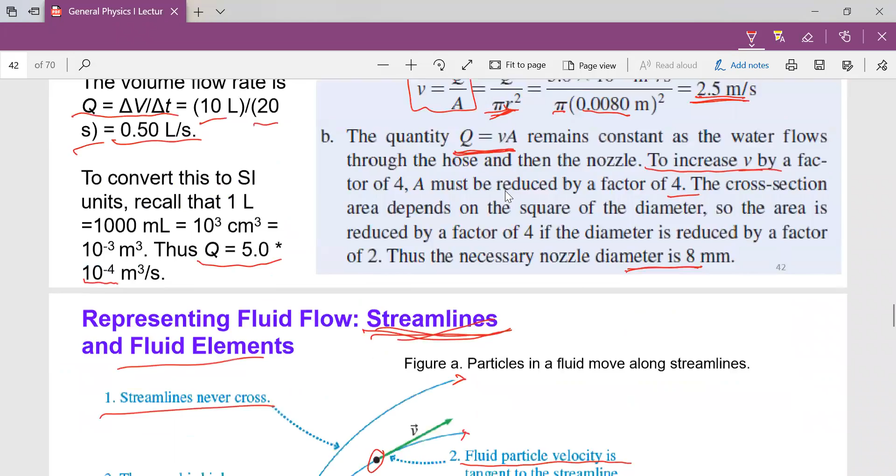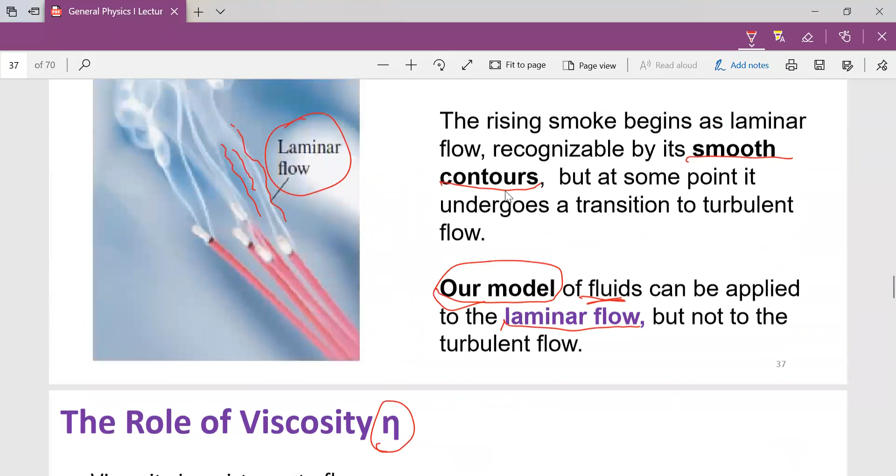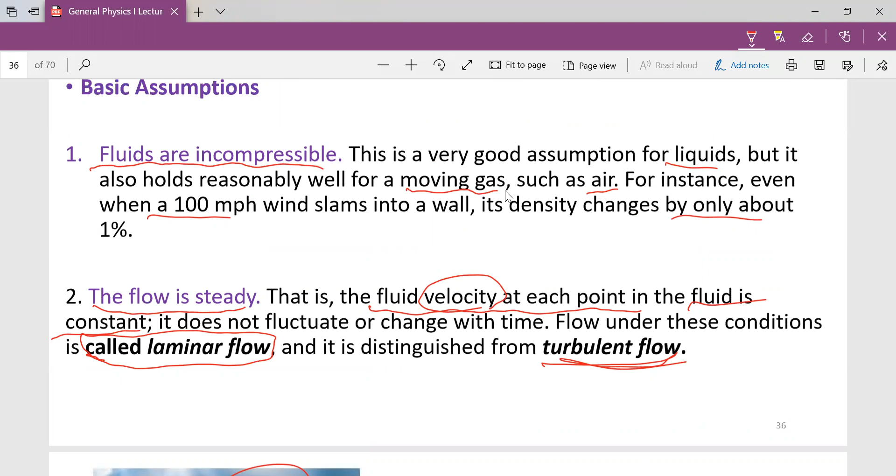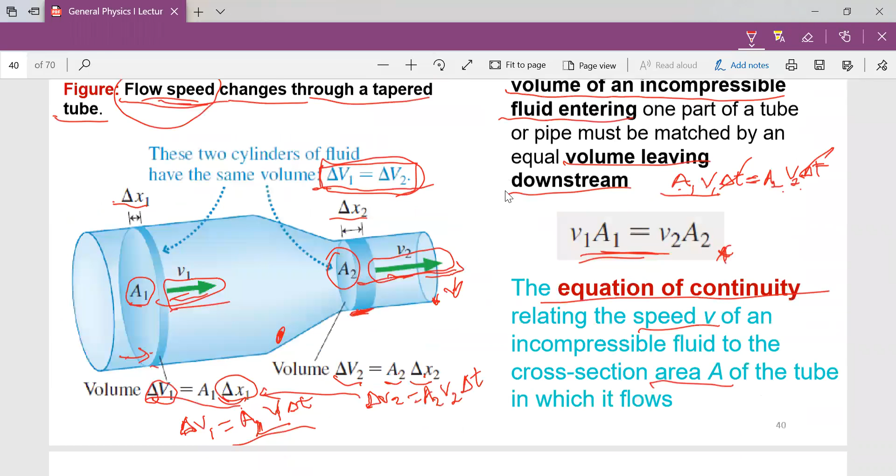I'm just trying to understand what is happening. Because if we're assuming that water molecules are just kind of moving around, if the diameter is less, they're more likely to come in contact with a wall. So that would make me think then the overall force experienced on the walls is greater. Okay, so here. Does that make sense? Yeah, the argument makes sense, in principle I get it, but I just want to understand it properly.

So, okay, when you look at the relationship, I'm not sure if I'm getting you correctly, but if I'm not, just correct me, okay? When you look at this fluid, I think this is the description where you want the clarity, right? I think so, yeah. Okay. So the basic thing, let's take that example of your toothpaste, when you press, that's the external force. Yes, a volume that will move from here.

When we looked at the description of laminar flow and fluid elements, when it was small, as it's getting wider, the fluid element shape got bigger, right? So the inverse is what is happening here. The shape here and the shape here, the V will be equal, because what you press here is actually what will come out here. So the volume you press is constant, and so is what will come out here.

But what is actually going to happen to that fluid element is that the shape will adjust according to the area available, the cross-sectional area. So it is that proportionality that defines it, also putting into consideration the relationship of the force applied and the area, which is pressure being equal to F over A, the force being pressure times A. That makes sense if we're defining it relative to volume.

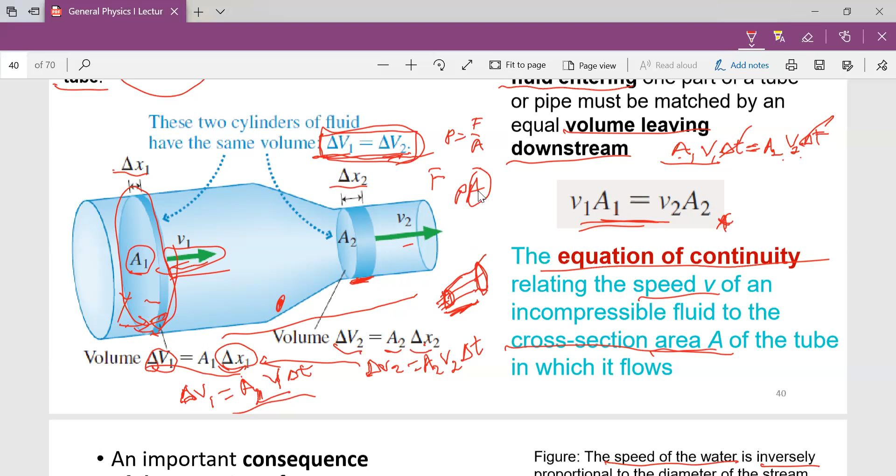So if we define it relative to the delta X here, if that were to be the same, would that mean that the pressure would be less? The delta X, yes. The volume is different? While volume is constant, pressure decreases. That makes sense. When volume is constant, right? The pressure decreases.

Okay, I will not put it that way, in the sense that if there's no pressure difference, there will not be flow. We will now describe it with the principle of static pressure, which we have seen in the last class using the description of atmospheric pressure difference for static fluid. But when it comes to fluid in motion, we use this principle of volume, which also tells you that the distance that this fluid will move is actually going to be in the same ratio,

the distance here. And that is why when we express this equation, we brought in the distance, defining it from velocity, because it's that push you give, the speed, change in x over the time spent to do that push, change in t. So when we equated the volume, factoring the time, later the time canceled out, because it's the same time as you push that you receive the result.

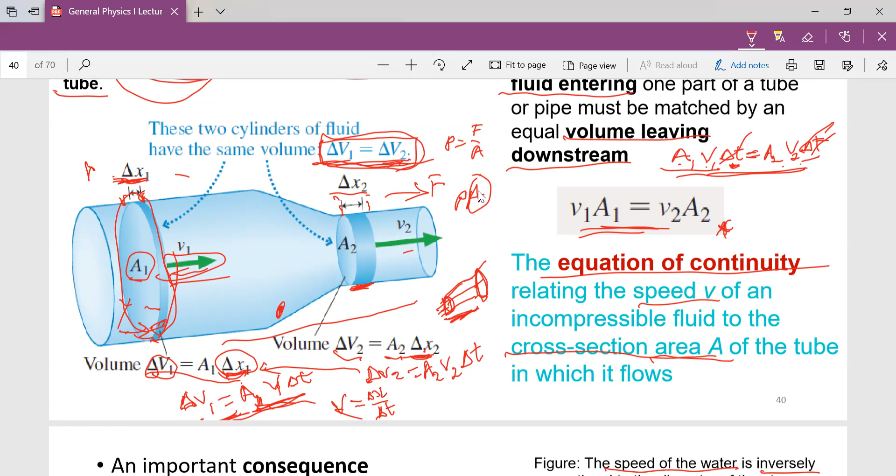Okay, so in a container full of water, it's going to experience that. If the container wasn't full of water, the forces would be different then? Yes. Like if it was half full? Okay, okay, I think I get it now. Thank you. You're welcome. So do we have any other question? For those mathematics lovers.